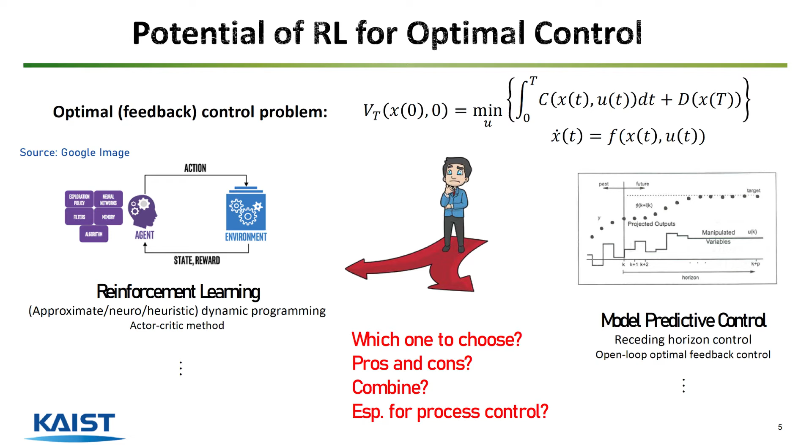So the outline is: we'll talk about MPC, we'll talk about RL, then we'll talk about their relative merits and see how they fit into the process control context.

So the optimal control problem that we study here is the finite horizon optimal control problem, subject to some dynamics, like a given system of ODEs. Sometimes you can use DAEs as well. And V_T is called the value function, which is an important term in reinforcement learning or dynamic programming, representing the cost achieved on the optimal control. So if you do everything optimally, how much would the cost be starting from this state? It's a function of the starting state, and it's a function of time as well.

A general solution is given by the Hamilton-Jacobi-Bellman equation shown here. That's a PDE with respect to the state variable, and you have a boundary condition as well. Once you get this value function, the optimal state feedback law can be easily derived using calculus. But an analytical solution is seldom possible for this PDE, and discretizing and solving it will certainly cause exponential explosion with respect to state dimension. That's referred to as the curse of dimensionality.

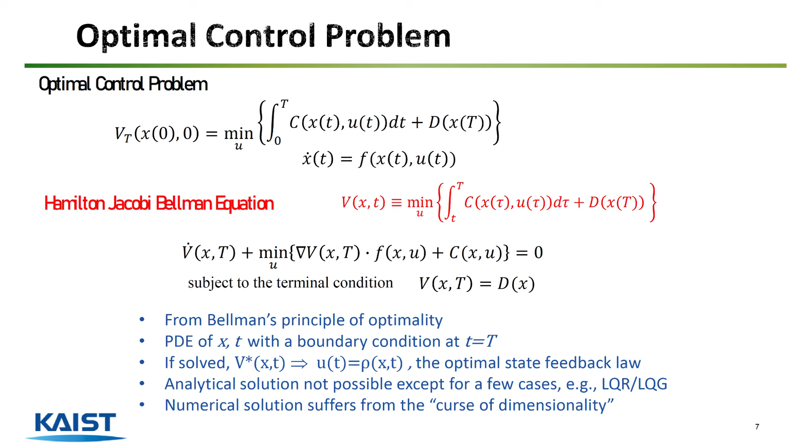So the HJB equation's solution is now not obtainable. As an alternative, MPC has emerged. Instead of solving the problem entirely offline, you can solve it online for a particular given state at each time. So whatever your state is right now, that will be the starting state, and you can solve it numerically using mathematical programming. That's easier than solving it for the entire state space. And as computing hardware got better and better, along with numerical methods, the MPC approach has become a feasible option.

It should be noted that even though an open loop optimal control problem is solved, it's actually a feedback control law, because only the moves for the current control interval are implemented, and the whole optimization is redone at the next sample time after feedback. This is called receding horizon control.

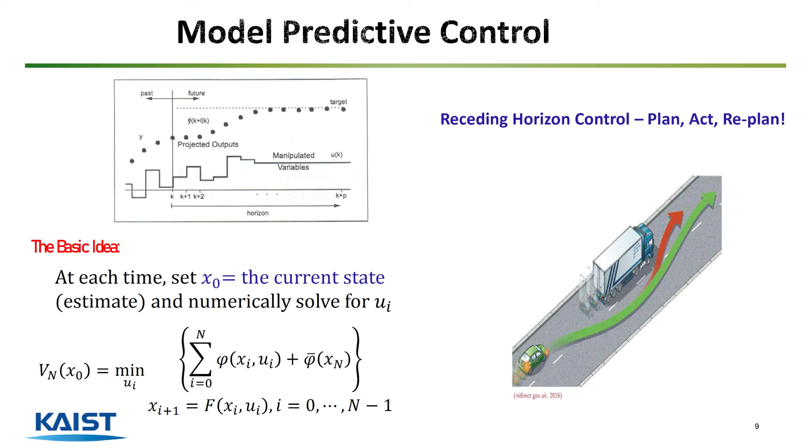The analogy is passing a truck, and I'm sure you've experienced it when you try to pass a truck. Invariably — I think it's human psychology embedded in our evolution, competitiveness — that truck driver doesn't want to let you pass that easily, so he speeds up. So whatever trajectory you had in mind, if you follow that, you're going to crash. So you have to adjust as you make the pass.

Again, to review: you solve the problem in terms of the input sequence for a specific measured state. Now, why is MPC so popular? Why has it succeeded so much? Because of the fact that you can enforce inequality constraints, which is a big advantage in terms of defining control problems, especially in process control. The optimization you solve is linear, quadratic, or nonlinear programming, depending on the nature of the model and the objective function, and these solution packages are getting better.

Back in the 80s, when MPC came out, they were kind of industrial heuristics, right? You do this, you do that, and it kind of works. But a lot of research has been done since then, and there's a sound theory now with horizon going to infinity. You can guarantee closed loop stability, and therefore, how do you mimic the infinite horizon MPC? That has been the key contribution of the theoretical research.

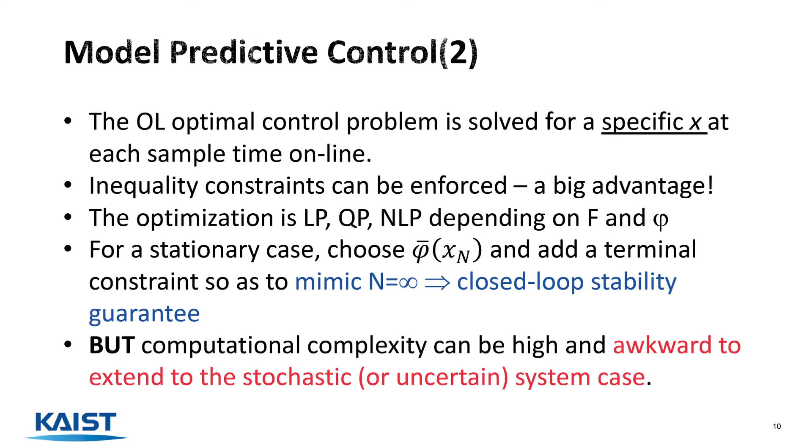I think one of the downsides of MPC is that it's an open loop optimal control, implemented in a receding horizon way, which means it only reacts to uncertainties as opposed to proactively planning for uncertainties. If you want to do that, you get into all sorts of exponential branching, stochastic programming, and it becomes a mess. So even though there are multi-stage MPCs proposed for better robustness, to me, it's not really extendable to practical problems.

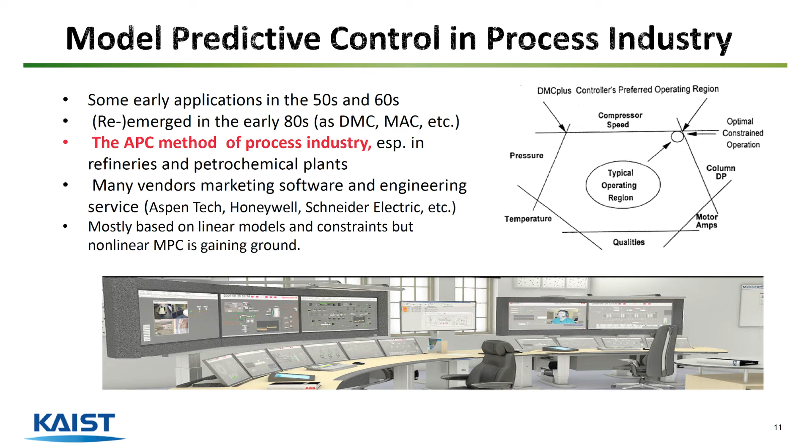MPC, as we know, showed up in the process industry. It's the de facto APC method of process industry. Many vendors, now it's all kind of standard. And it's not just the process industry these days, it's also automotive industries, aerospace industries, all using MPC for good purpose.

Now, reinforcement learning goes back a long way, actually, with psychologists like Edward Thorndike and mathematicians and computer scientists like Alan Turing. Alan Turing made this remark about trying to produce a program that can simulate the learning of a child, starting from blank and then gradually learning through experience. That vision of Turing has been realized today, with powerful computing hardware and deep neural nets and so on.

And it's threatening human cognition these days. People are worried that you're going to create something that's more intelligent than humans, that humans will become useless, right? They call it unconscious or non-conscious intelligence.

Anyways, formally in reinforcement learning, an agent learns a map between state and action that maximizes a long-term value function, right? Because it's a dynamic optimization, usually exponentially discounted, because you want to have a finite cost value for the infinite horizon case.

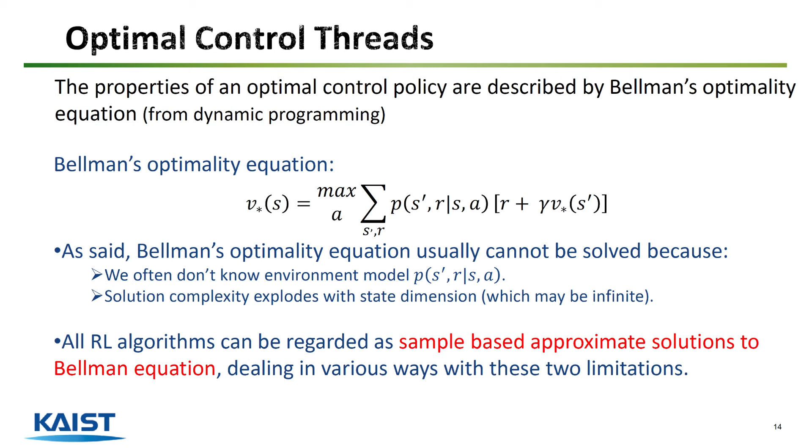And because the Bellman optimality equation cannot be solved exactly, one tries to conceive an approximate way of solving it. According to Sutton and Barto, all RL algorithms can be regarded as sample-based approximate solutions to the Bellman equation. So the interpretation of reinforcement learning is that you try to solve this formal Bellman optimality equation, but in some approximate heuristic way.

So research in reinforcement learning has come from different threads: temporal difference learning, which tries to learn the value functions through bootstrapping, right? So that's like Q learning and so on. Policy gradient methods, where you're trying to learn the policy function directly, skipping the value function.

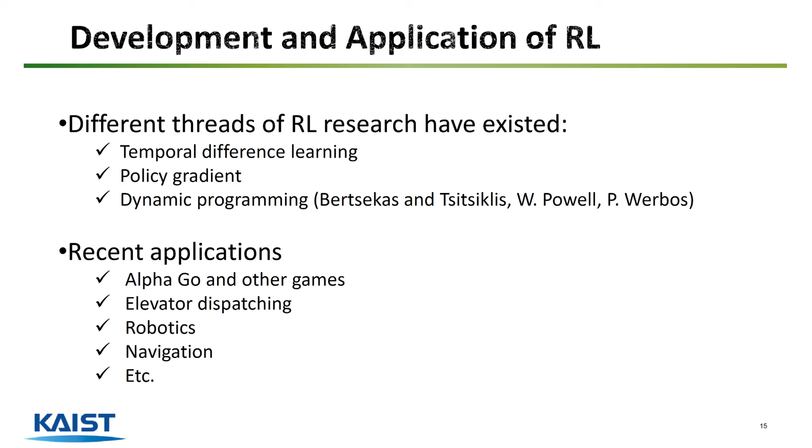And then the dynamic programming thread, with effort to approximately solve the Bellman equation, led by people like Dimitri Bertsekas, Warren Powell, Paul Werbos, and people like that. But these different threads are all reconciled now, and they form a coherent and unified field of reinforcement learning. And that has been applied a lot in games, elevator dispatching, robotics, navigation, etc. Not so much in process control.

But this is exciting—will it work for process control? That's the question that we have in mind, right? So first of all, in most chemical plants, it is very difficult to obtain a huge volume of exploratory data as required by most of these algorithms. They don't want to do exploration and continuous learning and things like that. That's why adaptive control hasn't taken off, in my opinion, in the process industry.

Second, one could use a simulation model to generate the data, but there may be significant mismatch. Simulation is just simulation, it's not the real thing, right? There's a mismatch, but you could potentially simulate this mismatch as well. So you can do simulation if you know where the uncertainties are—if you know certain parameters are uncertain, or you have certain disturbances with statistical nature and so on, you could do Monte Carlo simulations and learn a policy that would be quite robust against that.

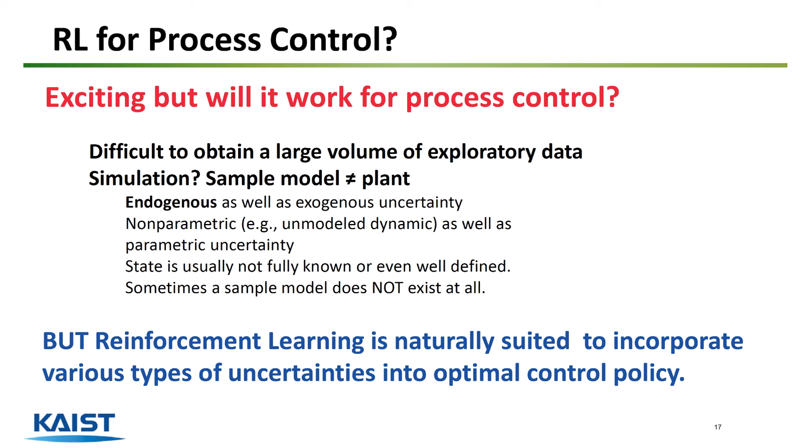So it does offer something very attractive, because it learns directly from data, and the data could contain various kinds of uncertainties. And that's also the theme of this workshop, Industry 4.0. I think at the core of Industry 4.0 is data and things like high fidelity simulation, digital twins, and things like that. So if we are going toward that, then we might as well use that for good purposes, right?

Okay, now let's discuss this further in terms of how reinforcement learning may be used in process control to complement existing technologies.

There's always this talk that MPC is model-based, reinforcement learning is data-based. But to me, both are data-based and both are model-based. Why? Because MPC requires a model, but the model usually comes from plant data, so you could say it's data-based too. It's like supervised learning and optimization—usually you take the data ahead of time, fit the model, and then use it for optimization. Reinforcement learning uses data, but it can also come from very high fidelity simulations. So it could work both ways.

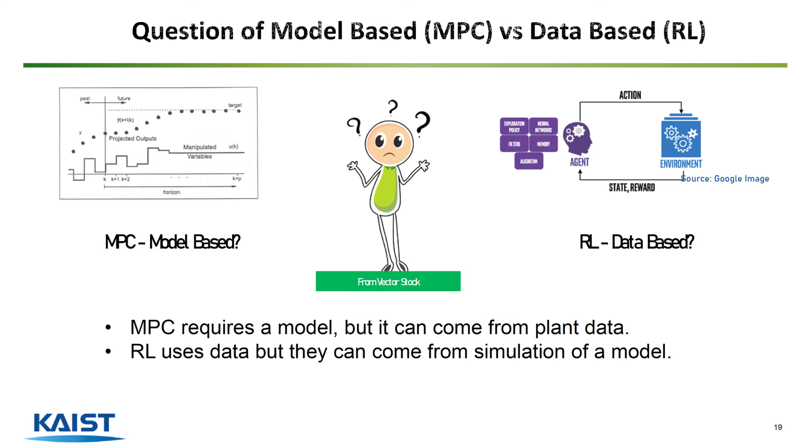And then there's this role of system identification. In the case of MPC, you usually do open loop testing, where you have a period perturbing your plant with steps or pseudo random binary signals, and then collect the data to fit a relatively simple model, like a linear model. And then you use it to design MPC, and that's it.

But that may not be sufficient, and the plant changes, right? So the model may not provide accurate prediction in closed loop setting. Feedback will help you overcome some of that, but will not solve it completely.

In reinforcement learning, there's also a sort of identification, but it's like adaptive control. Learning is done in closed loop over a much longer period, much like adaptive control, if the learning is done entirely online. But due to its closed loop nature, the balancing of exploration and exploitation comes up—how much you want to explore versus how much you want to be cautious and exploit the information you already have.

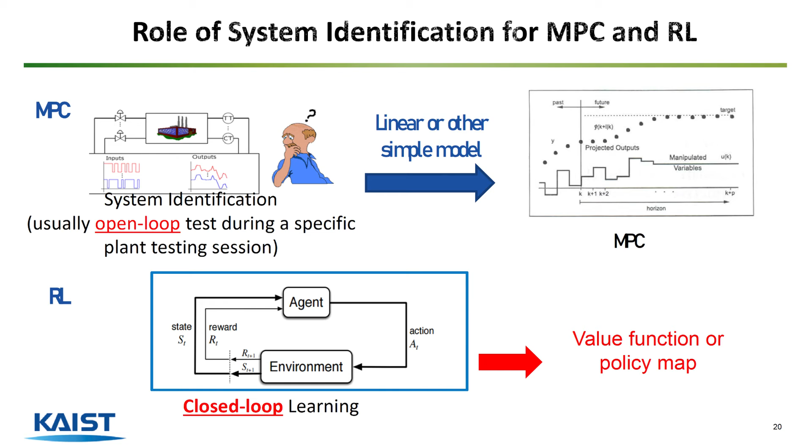Also, instead of a linear model that's learned in MPC, the value function or policy function, which are usually nonlinear, are learned. That's why you use things like neural networks. But you don't have to use neural networks for reinforcement learning.

So what are the advantages of reinforcement learning versus MPC? One of the advantages is the modeling can be implicit. So it doesn't not use a model, but it may be implicit, like in the Q function, which expresses the value function in terms of state and action. It implicitly includes the system dynamics, transition dynamics.

Another advantage is that it can handle nonlinear stochastic systems in a near optimal way, given that enough data are produced through Monte Carlo simulations. So it's more than just reacting to error given by feedback. In fact, it is more robust, actively guarding against future uncertainties, as well as actively reducing uncertainty, as in dual optimal control.

Also, it works with data samples rather than a mathematical model, which can be more general if you think about it, because you don't really need a certain form of model like ODEs. You don't need a declarative model—you just need a computational model, sampling model, whatever that can give you data samples through computer simulation. That's a lot more general.

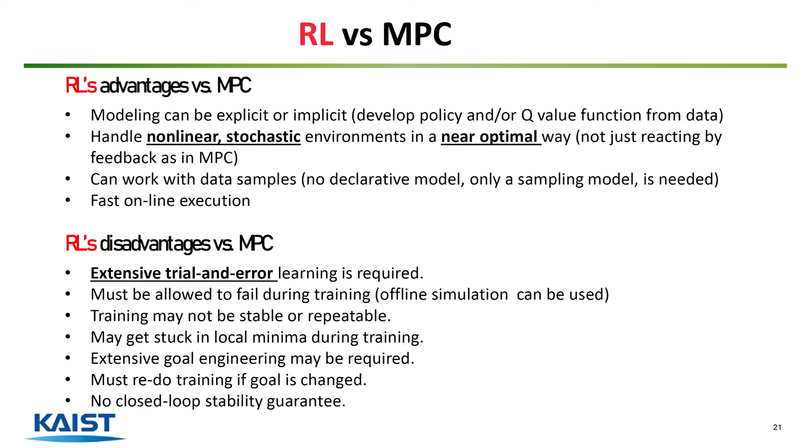Well, this is like you have some of that in MPC as well. If you're doing explicit MPC, for example, whenever you do offline learning and something changes, you must redo it. If you're doing online optimization, you may be able to change it on the fly. And it's difficult to provide any sort of theoretical guarantee, but this was the case for MPC as well in the 80s—it was largely viewed as industrial heuristics, but a lot of research solved that problem. So I expect the future will also correct this issue.

But the encouraging thing is dynamic simulations are becoming more widespread, but there are significant model errors. If you can model those errors, you can embed that into simulation. Models are often very complex, so it may be very difficult to use them directly online, and that favors offline approaches.

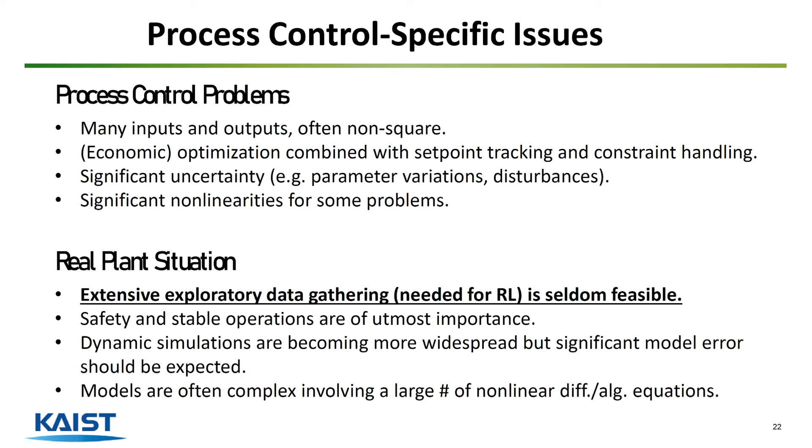Okay, so should we replace controllers with MPC controllers with reinforcement learning? I would not say so. I mean, at least for continuous plants like refineries and chemical plants, model predictive control is so well established, it's going to be very difficult for something like reinforcement learning to penetrate and replace it. It may be able to complement it, make it better. Okay, that's a better way to think about it.

But then there are kinds of problems that MPC has not penetrated, like batch process control that Prof was talking about, and I think that's a very good opportunity, especially because it's a nonlinear stochastic problem. So when dynamic simulations are possible, you have a good starting point to use simulation data to build a good initial policy, and then you can further adjust it online.

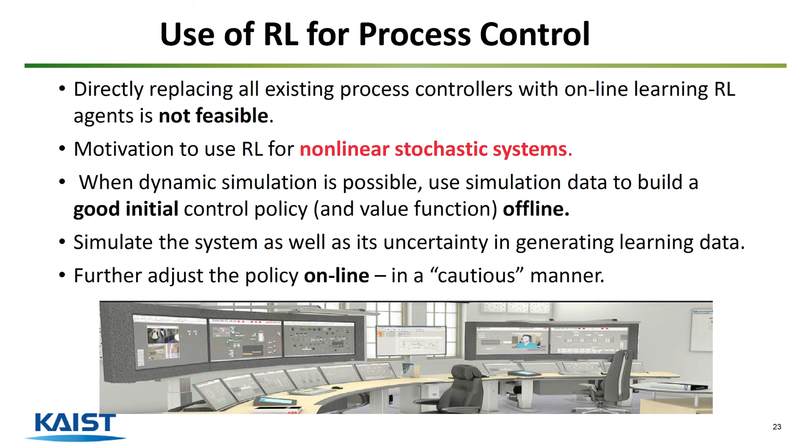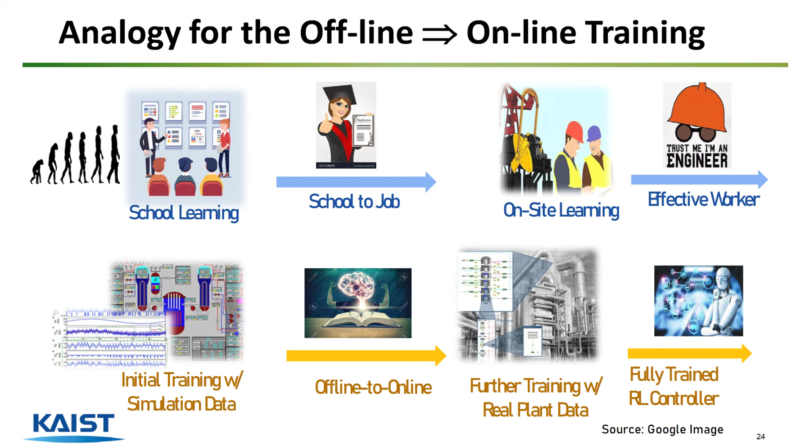Okay, I kind of make an analogy to human learning, right? Most of us do not learn from scratch. Actually, our DNA is optimized through millions of years of evolution to begin with, and then we are educated. And then you become an effective worker after all that education through on-site learning. So just like that, we shouldn't subject a reinforcement learning controller directly online. You should use whatever information is available and come up with an initial training to get a good starting controller, and then you can further adjust it online according to the need. Just as Prof was talking about model migration and so on, all these things are applicable here.

And so how do we combine MPC with RL? I think value function can be useful. If you can learn value function offline, you can certainly use it in MPC to shorten the horizon, as well as to provide better robustness, in my opinion, if it's learned with model uncertainty. And model predictive control can also help in terms of reinforcement learning offline, because it gives you a good starting policy, a suboptimal policy, where sampling becomes much more efficient.

Now, online, you can also help each other. The reinforcement learning gives an initial guess for the optimization after a large change. So if you're doing nonlinear MPC, for example, you can get a pretty good initial starting point. And also, model predictive control can serve as a backup when an unexplored state is encountered, where you don't trust the reinforcement learning anymore. So they can help each other in this way.

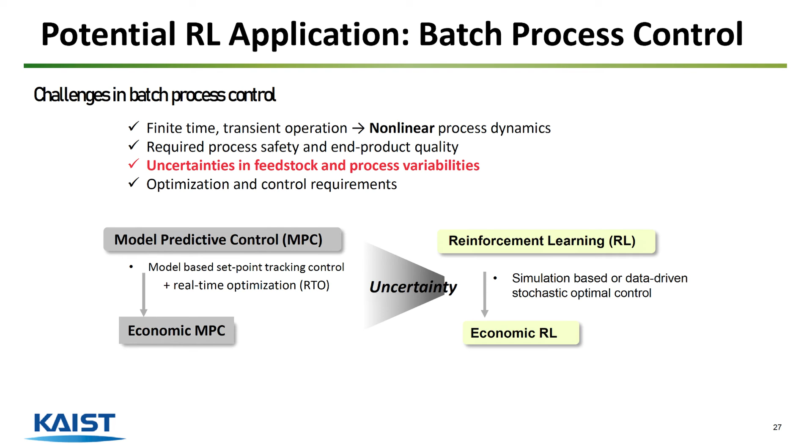Now, one very interesting application, or the opportunistic application you have, is batch process control. Because if you look at the challenges in batch process control, and I'm so glad that Furong went before me because he explained all this. You experience a lot of these non-stationary, nonlinear dynamics. And then you really have emphasis on end product quality. Uncertainties are prevalent, and you have optimization as well as control requirements. So you have MPC, nonlinear MPC, and economic MPC trying to address that. Iterative learning MPC, we worked on it, Furong worked on it, and so on. But those are useful, but reinforcement learning, I think, adds an extra dimension.

Okay, so what are issues in designing reinforcement learning for batch process control? Choice of reward function, penalty function. Do you want to do bootstrapping, temporal difference, where you're doing heavy bootstrapping, or do you want to simulate a lot with Monte Carlo simulation and do deep backups? And then do you want to go value-based algorithm, policy-based algorithm, or actor-critic that uses both value and policy approximations?

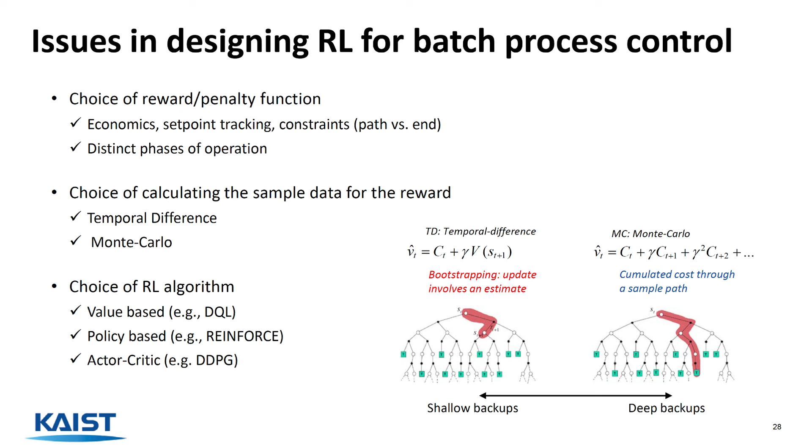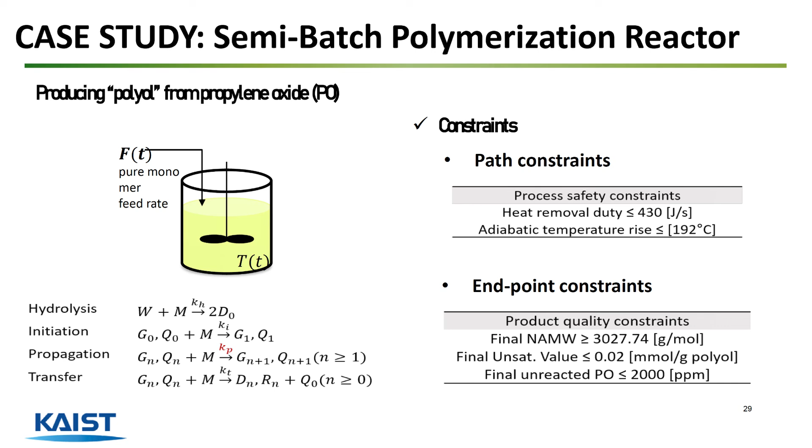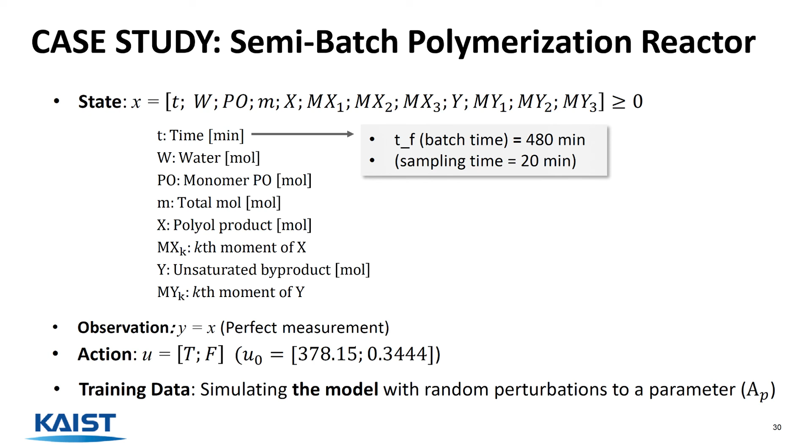So just a case study of a semi-batch polymerization reactor. This is a polyol reactor produced from propylene oxide. And it's a very complex process with path constraints and endpoint constraints and so on. It's got a 12-dimensional state space, 2-dimensional action space. We're going to assume perfect state feedback for now. And the training data are produced by simulating the model with random perturbations on some of the uncertain parameters, and so on.

And one lesson is that, as Furong also said, there are distinct phases, right? So there's a feeding phase and a reaction phase, but there may be a lot more phases and so on. And the question is, can we really fit one neural network to the entire thing, a single neural network? Because then maybe you're trying to stretch a function approximator to do a lot, and you can get into trouble by doing this. So maybe you want to fit different actor-critic networks for different phases.

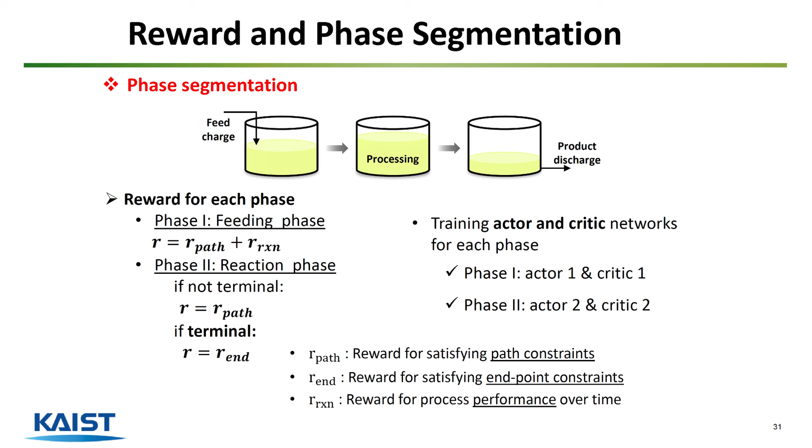The second thing is in terms of learning algorithms, you can consider deep deterministic policy gradient, which is an actor-critic method. Bootstrapping is dangerous here because if you're doing shallow backup, initially you get a very bad estimate. And the emphasis is at the end of the batch—a lot of important requirements are at the end. So initially the value function may not converge because you don't have a very good estimate to begin with. So indeed, you do have to do deep backup to see the end result, to come up with a pretty good approximation of the value that you will get at the end of the batch. We found that the Monte Carlo deep deterministic policy gradient works much better.

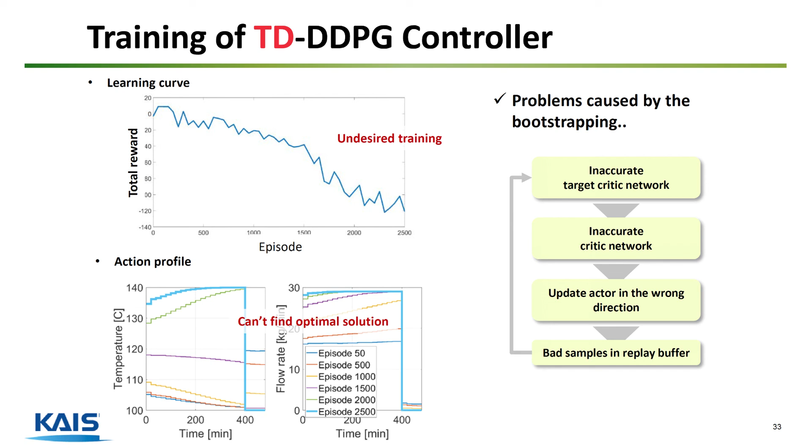That's shown here, that temporal difference DDPG diverged, didn't really do the learning properly. Monte Carlo deep deterministic policy gradient did much better in terms of learning.

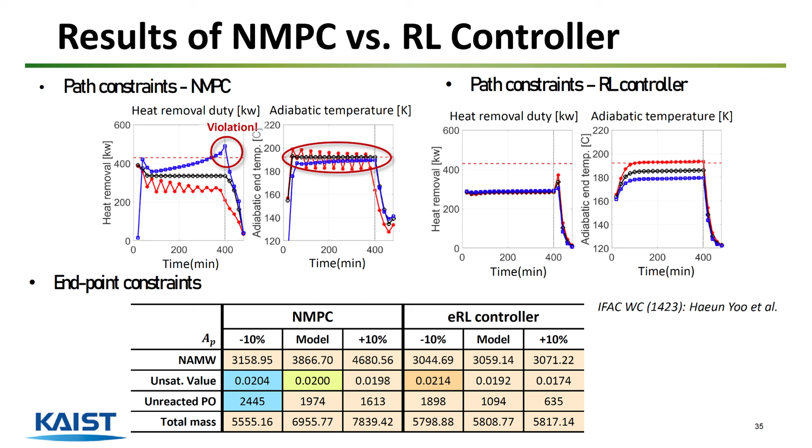Compared to the nonlinear MPC, because of the model error, it violates path constraints, it violates the end constraints. And if you can incorporate those in the simulation data, in the learning data, we can learn it so that

the constraints will be respected despite the model error, and end constraints are also satisfied. Now, a real opportunity related to Furong's example is this batch-to-batch learning and this active learning, okay? This reinforcement learning can do active learning. It can

actually balance optimally the two objectives of exploration and exploitation. So when you have uncertainty, you have to do this. This goes back to the dual control concept introduced by Feldbaum. And the question is how to balance it, right? Bayesian optimization also does that, but in a heuristic way. So reinforcement learning does it in a much more formal way in

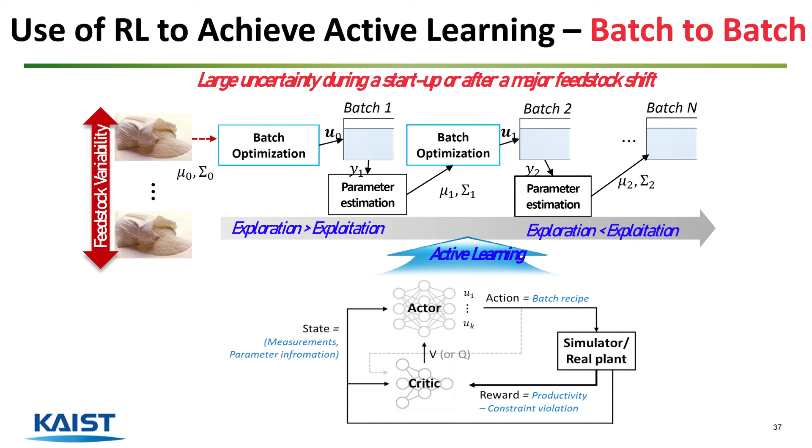a multi-stage context. Okay, so you've got this batch-to-batch learning. If you have a product campaign, it usually lasts for a long time, and then you may have a feedstock switch, and it doesn't switch that often. Once you switch feedstock, you may do many runs. So there may be some learning to do whenever this transition happens in terms of products or in terms of feedstock. And so you may actually want to balance exploitation with exploration here.

So let me show you an example of this in the context of biobutanol fermentation. You can show there are 4 uncertain parameters that change according to the feed quality. You've got fixed batch time and end product quality and so on.

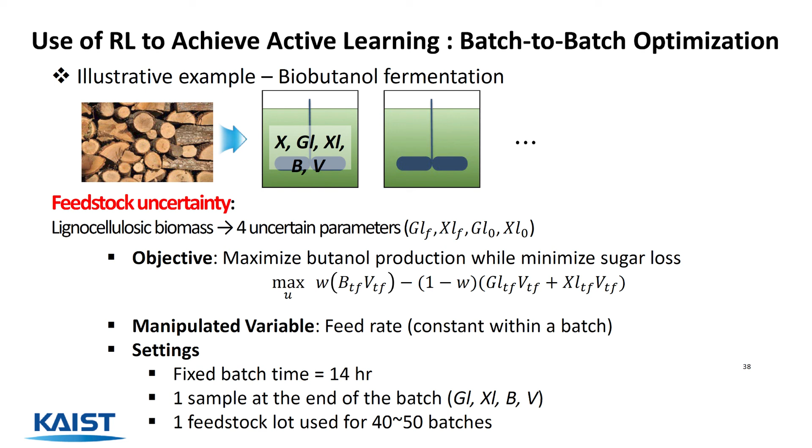Okay, so let me summarize the reinforcement learning. I tried to give you the basic concept and possibly some perspective, an industrial perspective in terms of where this may fit in, what it can do.

Now, I said it's for continuous system control. I don't think it can just get in there and replace MPC. It can complement it certainly, and we have to look for ways of doing that. For other applications like batch operation, you have much better opportunity in terms of starting something entirely new, in my opinion. So I think it has a role. I think the role will be one of a complementary nature, to enhance the performance and broaden the scope of existing optimal control methods like MPC and ADP.